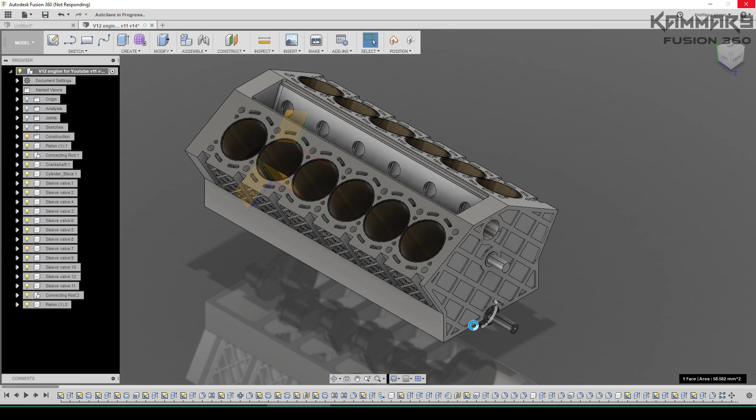When you rotate now the crankshaft here, you have to see this movement of the pistons.

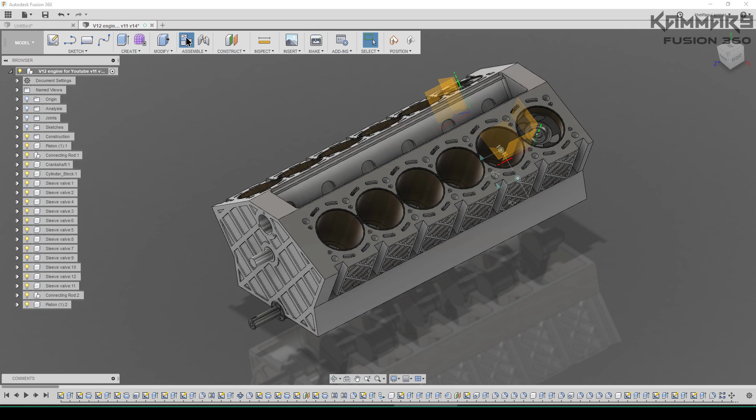To start, I will create another component here. To do that, go to assemble, new component, or from new component here. Make sure this one is activated.

Then you can rename this like cylinder head. Okay, then activate it. Press OK.

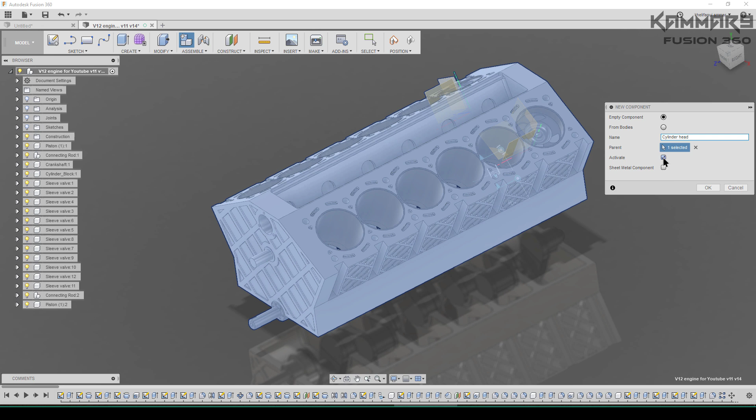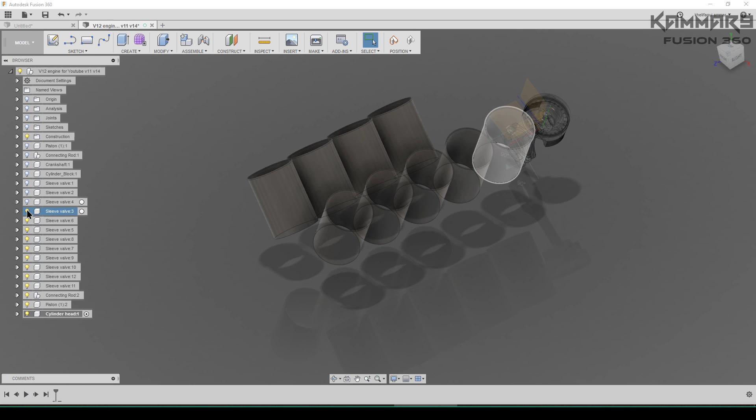For me, it's difficult to work like this. What I'm doing here, I hide all of this, or you can select all of these. I think you can use shift in Windows, then hide.

Then you can start your, show the origin.

Once you show the origin, make sure the Z axis is here, the X axis is here, and the Y axis is here. Then we start in this plane.

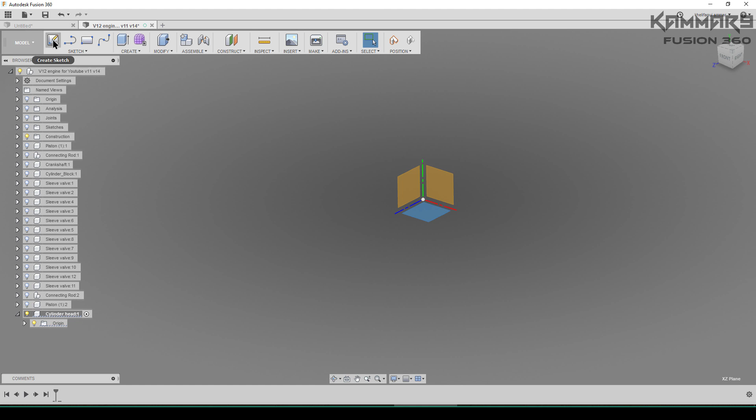Select this plane and go to sketch. You can continue.

Then start with a rectangle. Start from here to this side.

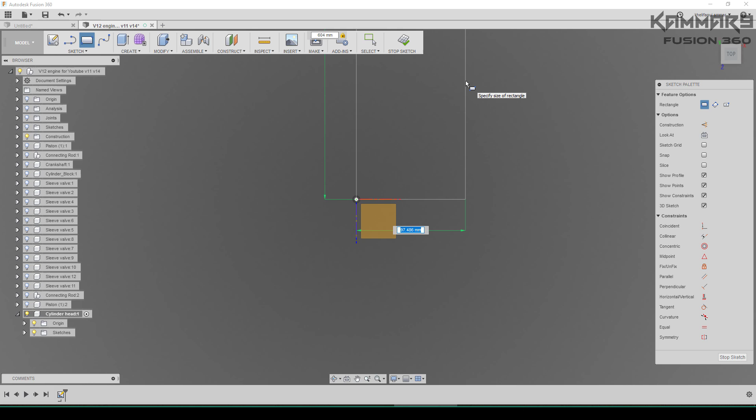Then what we have here, we have 604 millimeter. Switch with the tab in your keyboard and put here 145.

I will add a caption to say exactly the dimensions here.

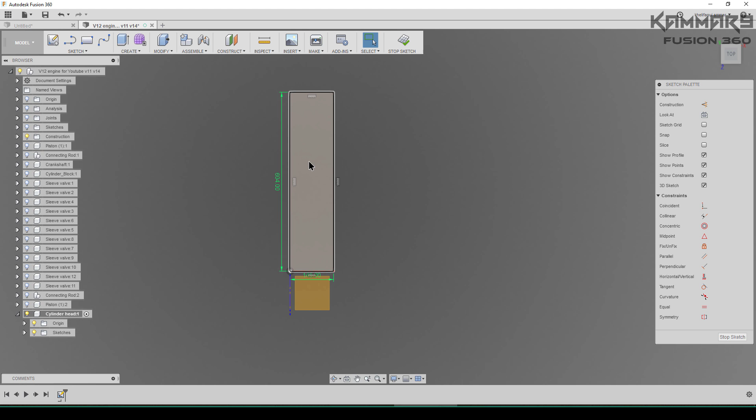Now what I have to do here is to add an extrude. Select this.

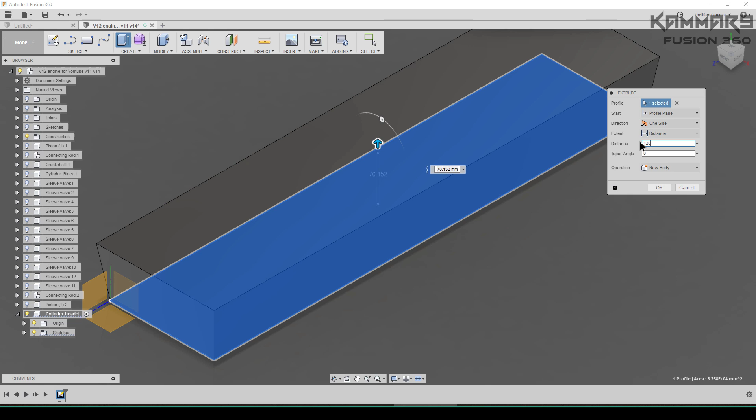Then I have just to activate taper angle here. Sorry for that, I can't see exactly the angle. The angle is 8 degree, sorry for this, and the distance we have 120 here, and you can press OK.

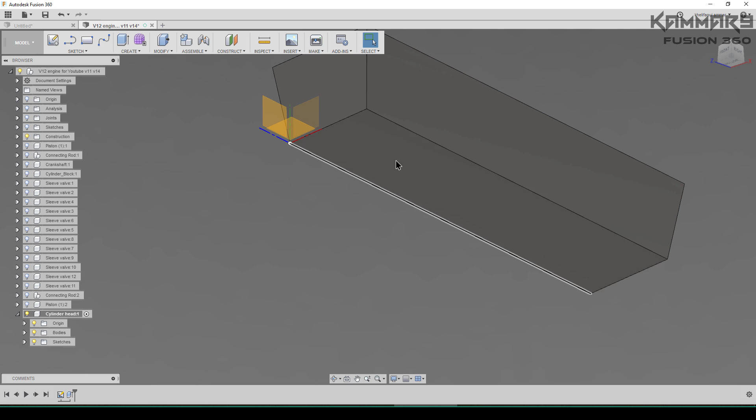The next step is to add line here, okay, like a reference.

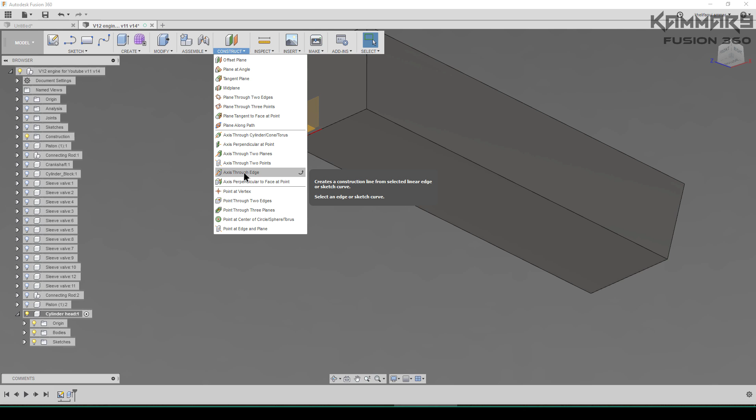Go to here and you can add axis here, but the problem, I'm looking for axis, but I can't find it. Okay, it's not a problem.

I have just to add a point here. Go to sketch, select this surface and go to sketch, create a sketch, and rotate your model like this.

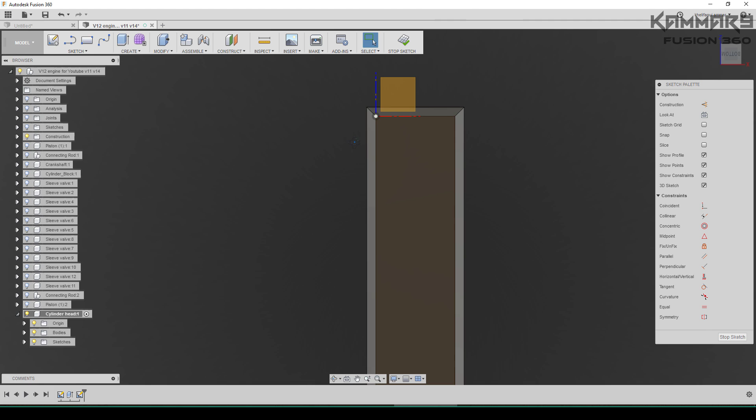As you can see, the X and Z axis are here. Then add a point, go to here, look for point, add a point here.

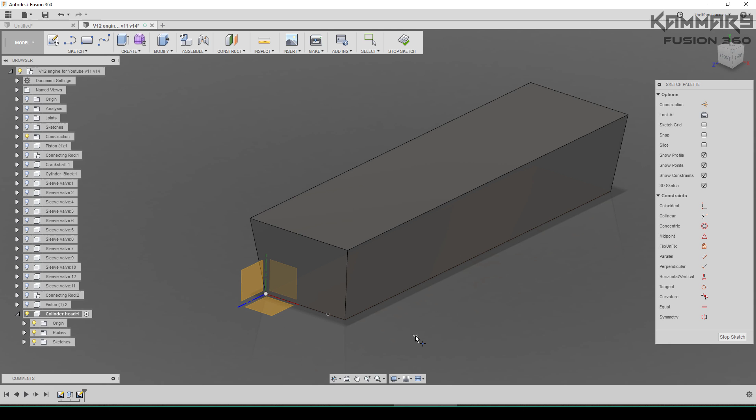The distance of this point, I'm looking for the distance, press D. The distance here, we have 36. And just stop the sketch.

We need this point to add a reference plane. Use construction here. Then look for plane at angle.

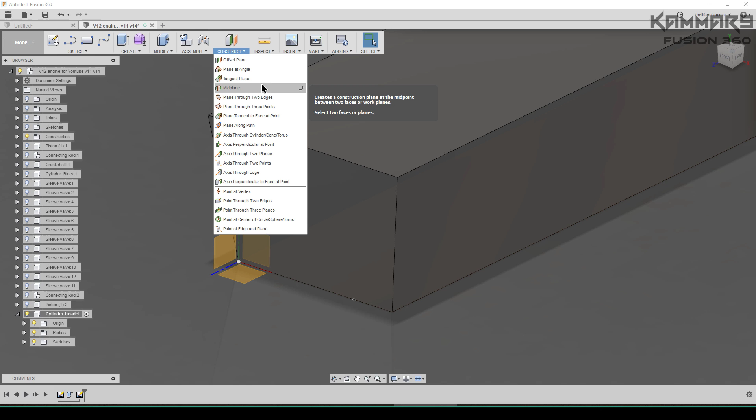As you can see here, tangent plane, plane at angle.

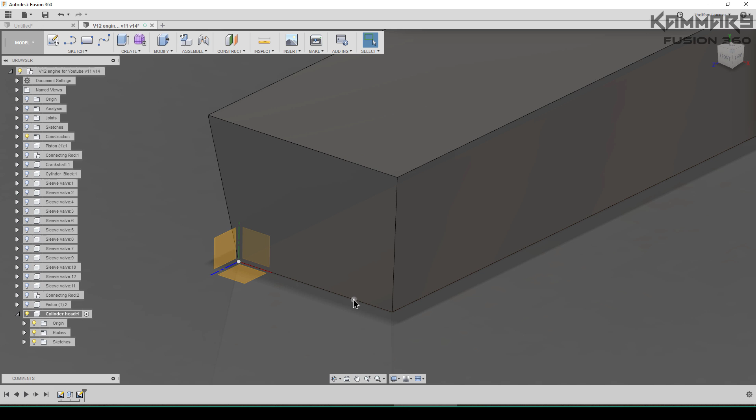I want to add, it's not the same thing like SolidWorks. I will edit the sketch. Go to here, edit your sketch.

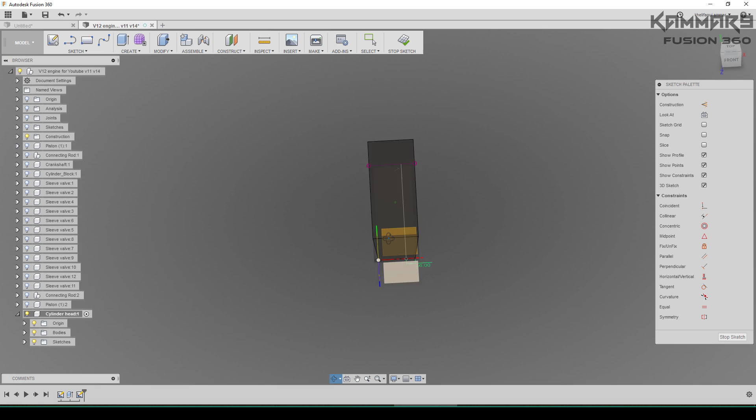To do it simple is just add line here. Verify your work. As you can see, from here to here we have 36.

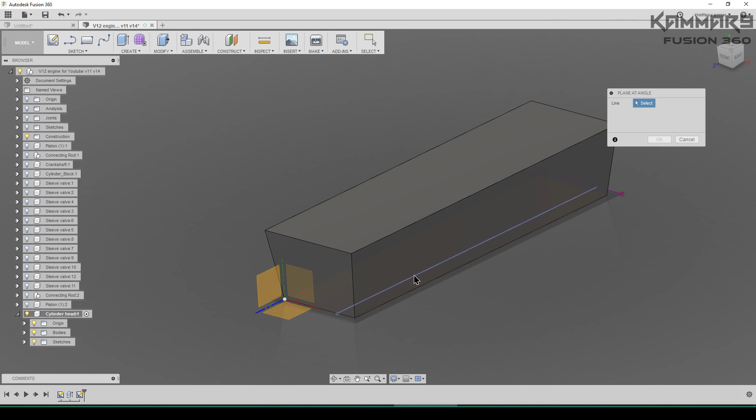Stop your sketch, and now when you go to here for construction, you will find plane at angle. Select it and go to this one, and now you can rotate it.

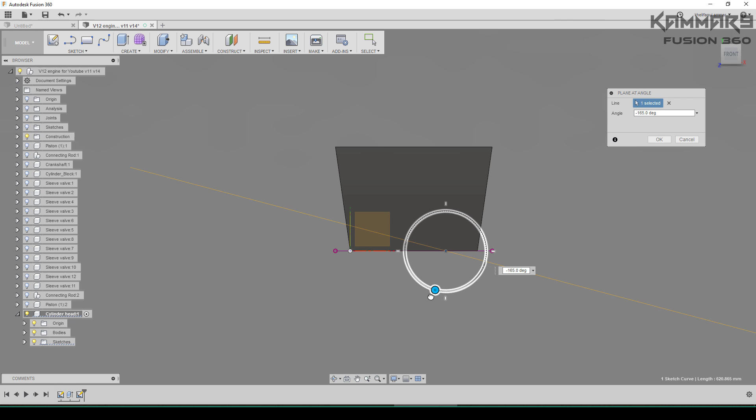As you can see, for me, I will rotate it looking from here. You have to see X here and Y here, and your plane, it will be like this.

But the angle here is 165. Okay, then press OK.

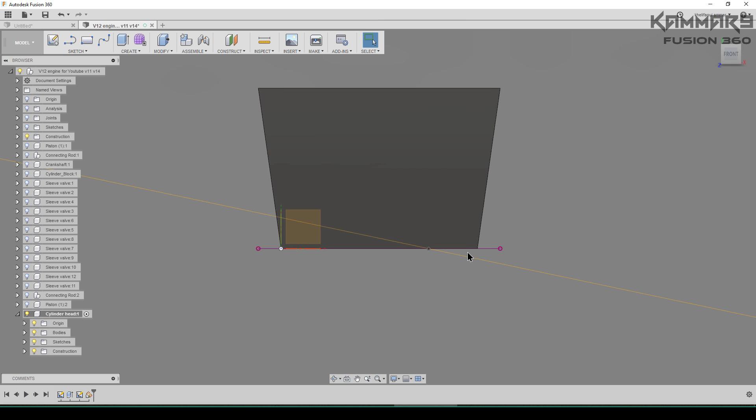As you can see, we have now a plane here. I will select this and go to sketch.

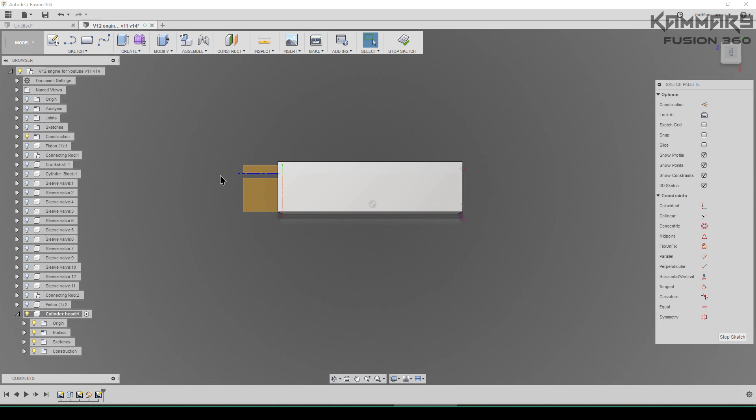You have to rotate your model, or you can use slice.

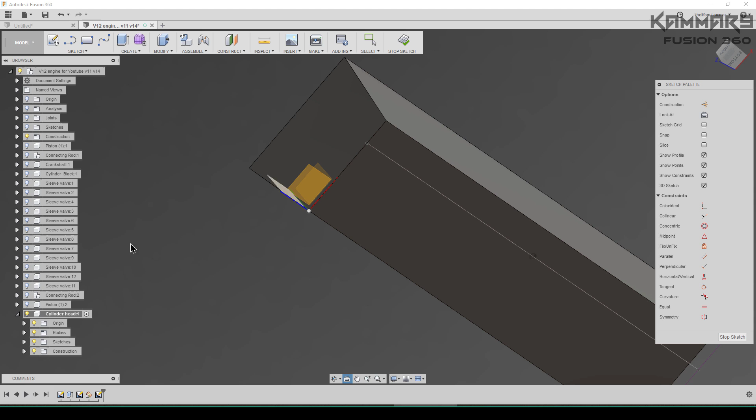I want to use slice because here, okay, then look at, but I have to show the plane. I need you here. Look at this one.

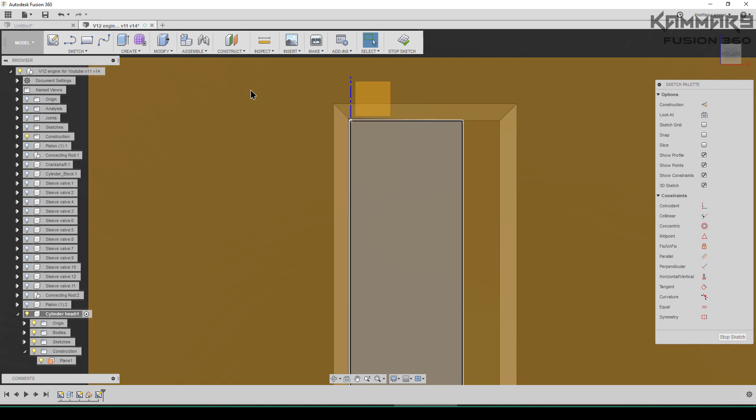Rotate your model like this and use, starting with a line.

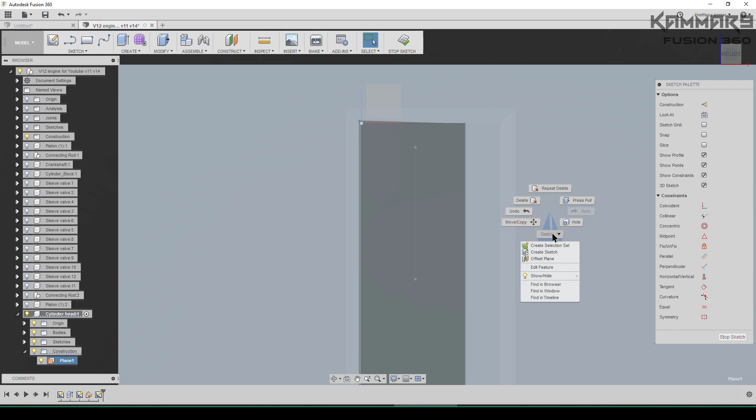It's not a problem when you start from here. Okay, just for make it like reference, I need sketches. I need the distance from here.

Okay, make sure your reference is here. From here we have 75.

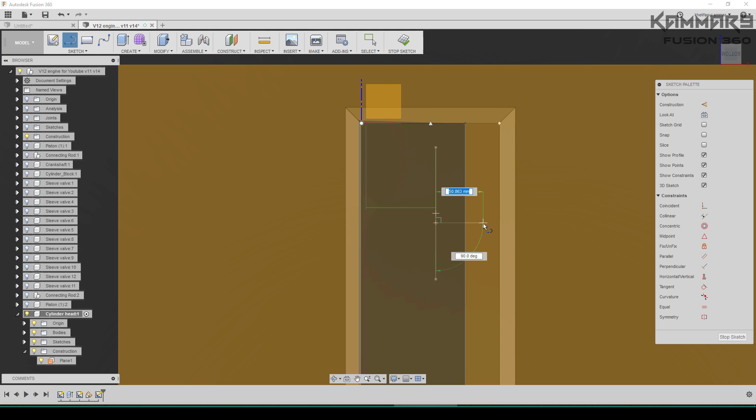Then I will add another, okay, let me delete this distance. From here we have 97.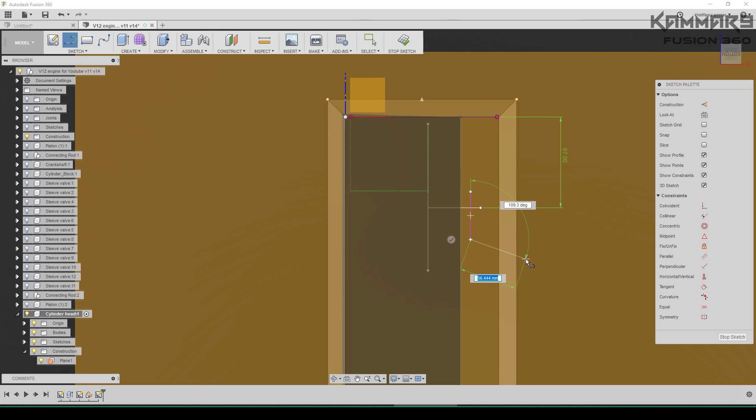Once you finish that, add another line here. Distance we have 30.

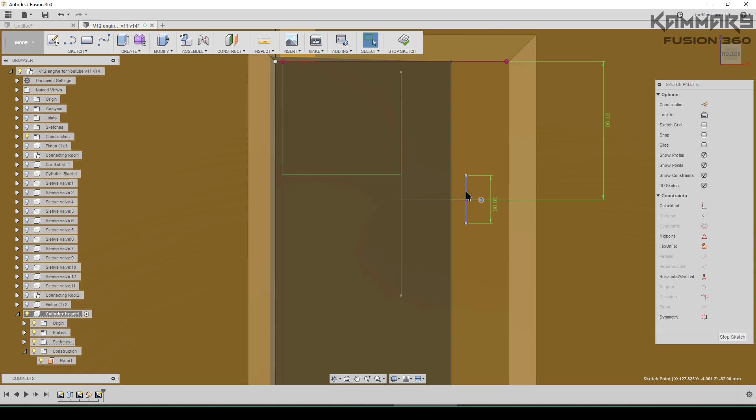And make sure, I'm looking for coincidence midpoint. Let's see, midpoint, there you are. And we have a midpoint here.

Slice to see what's going on there. You can hide this. Then we have the distance between this line and this one.

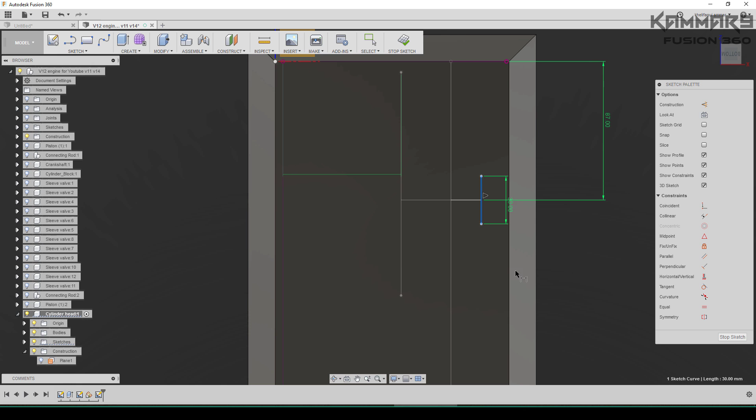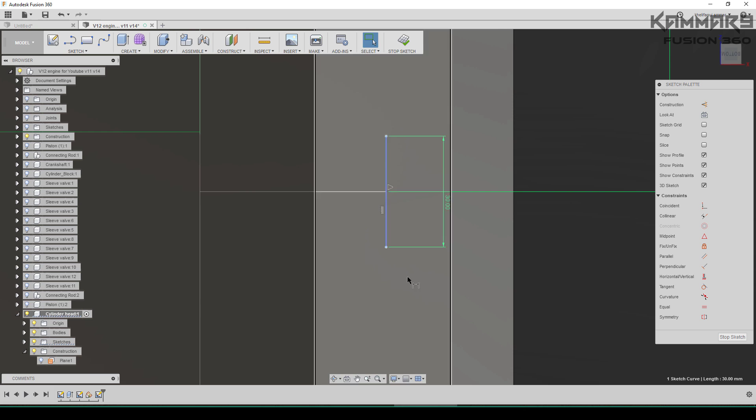There is a problem here because this one is not horizontal. Make sure that's horizontal or vertical. Then the distance from these and this one, I have to put 30 here. From here to here I have to put 30.

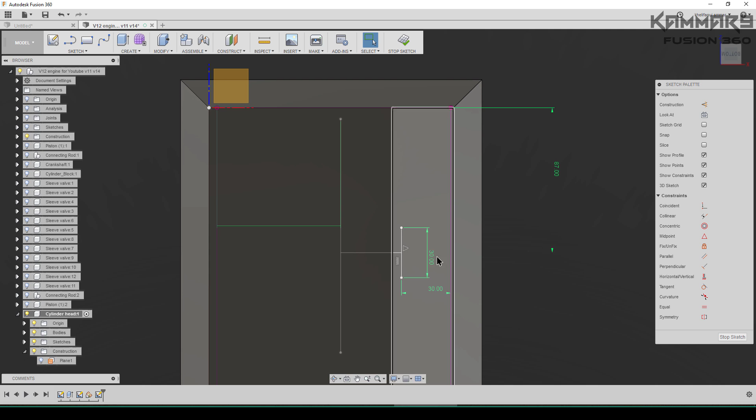Okay, step by step. We have the distance here. Here it's okay, here it's okay, and I have to add...

Okay, I have a mark here, then the distance... I have distance here 87. Then make sure that's the midpoint of this one.

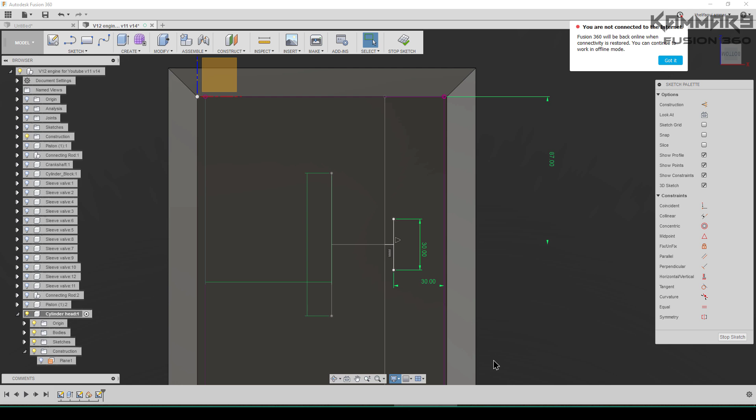Okay, I will show something here. Visibility, it's not okay. The effect, environment, dark sky, photo, infinity pool. I think that's okay, we can see better. Let's see, okay, I think that's good.

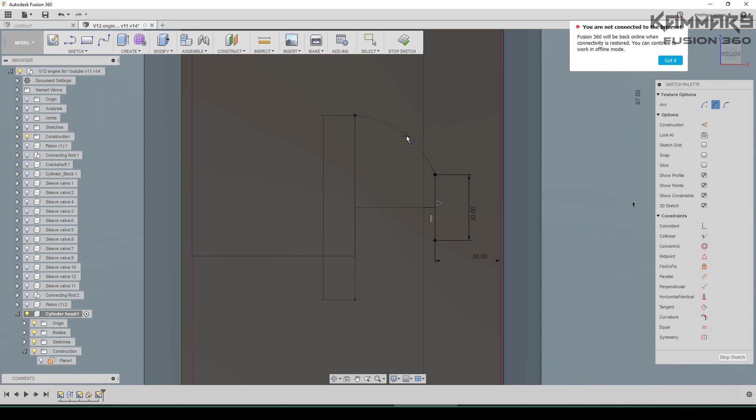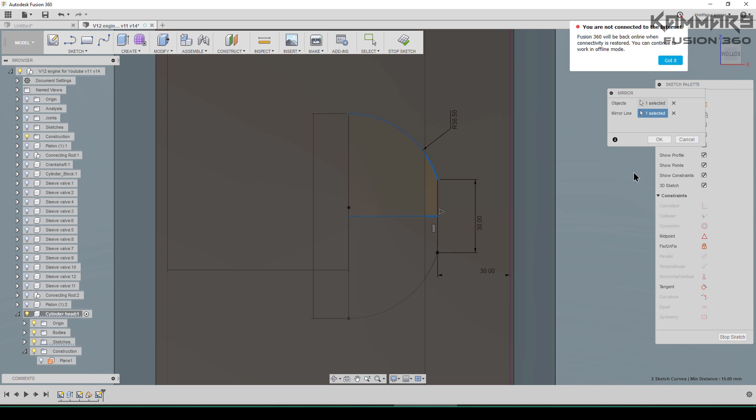Then I will select it and go to the mirror. Use here the mirror line, then press OK. Now whole thing is alright here.

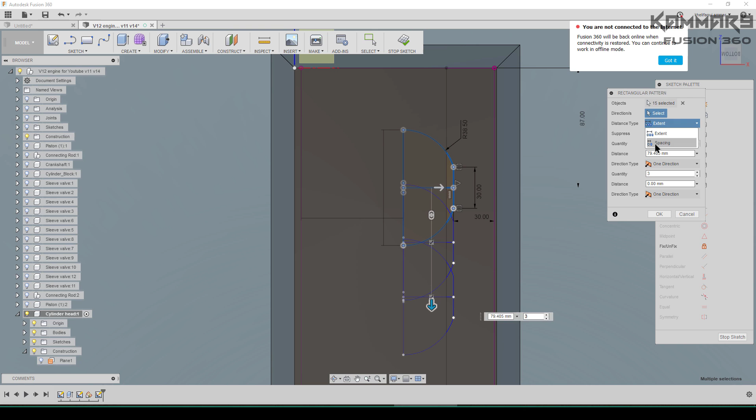Then I will select all of this one. I will repeat it using rectangular pattern. The distance, the direction is this one. For the X distance type, I will use spacing. Spacing is, we have 90 here. Then you repeat this 6 times. That's okay.

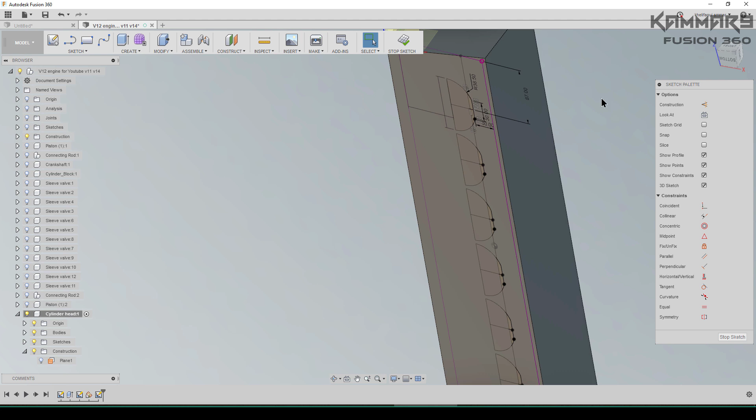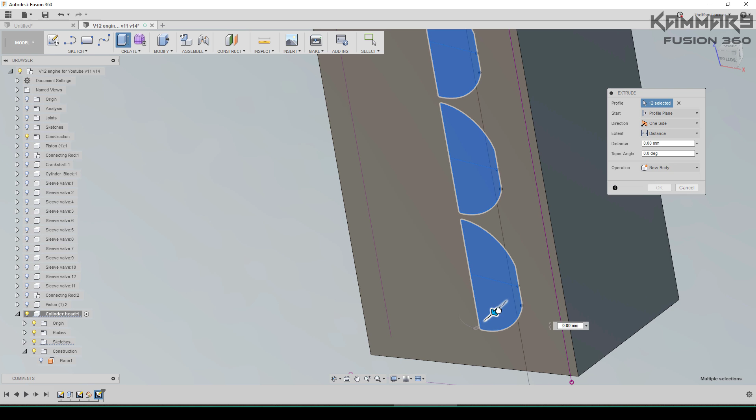Then use extrude cut. I will use extrude cut that you can got it. Can use extrude here, then select all of these profiles, and cut it with...

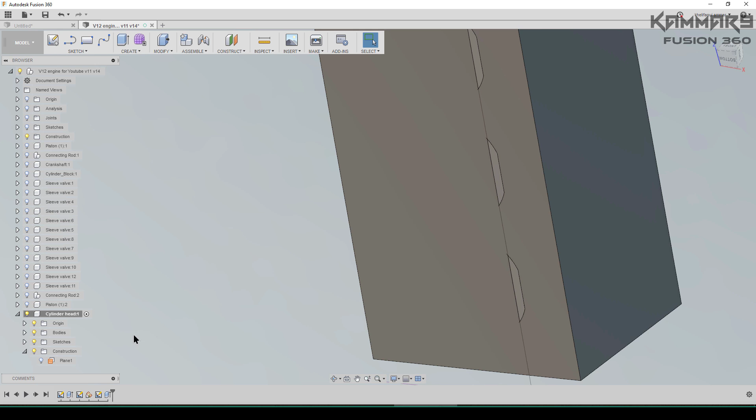Two minus 2.5. I think it's not okay because the extruded cut is 20, it's 21. Okay, that's good.

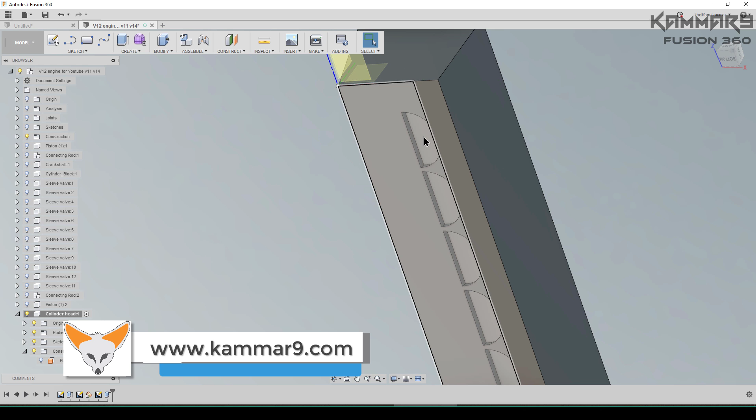Now I will create two circles here, one circle here. I have to hide the sketches. Don't forget to save your file. Saving here, then select this one, go to sketch,

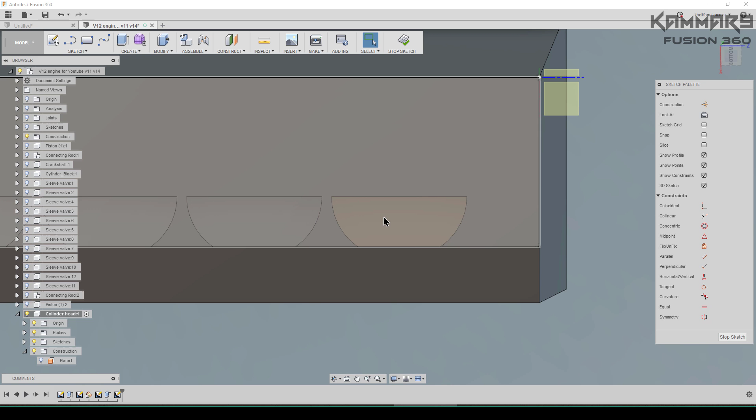then add circles. We have one circle here, another here. Make them equal, select two of them and go to equals here. It's too difficult to work like that. I will rotate it, as you can see, and add some dimensions.

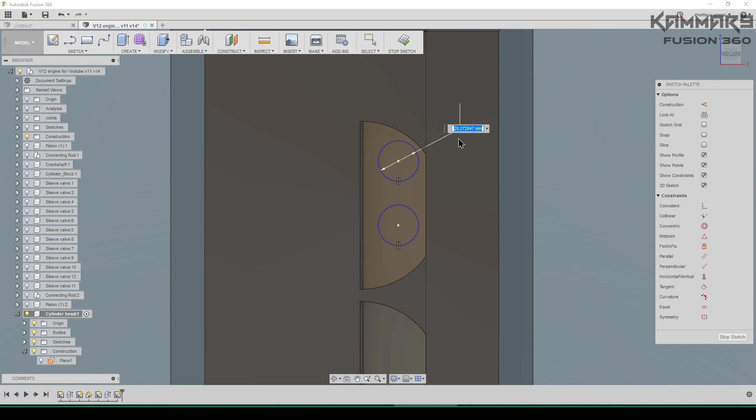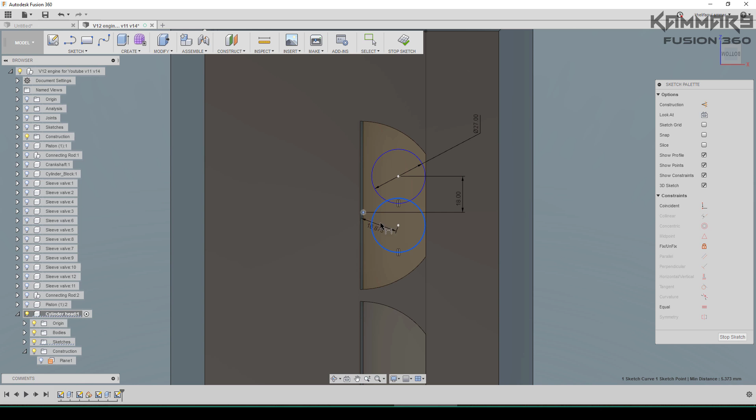We have 27 here. From the center we have 18. The same thing for this.

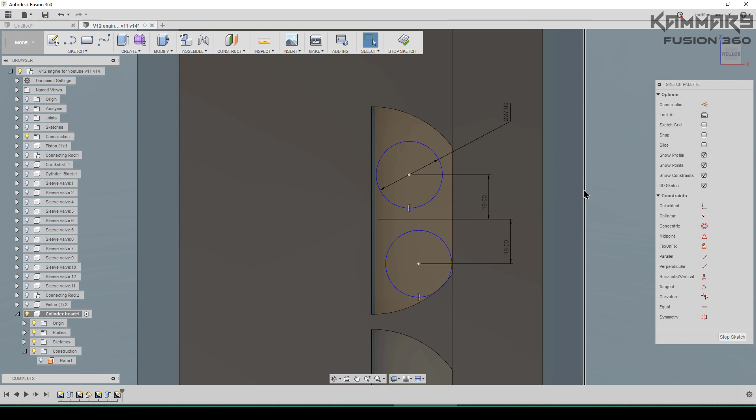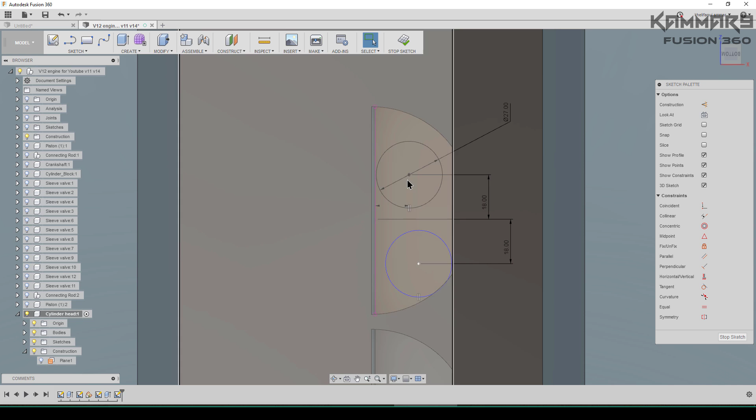Here, then the distance between, because we have 2 points, I will tell you now if it's okay. It's not okay because in SolidWorks I did it from here. From here to here. Okay, then you can just use the... where is it? Vertical between these. Whole thing is alright like this.

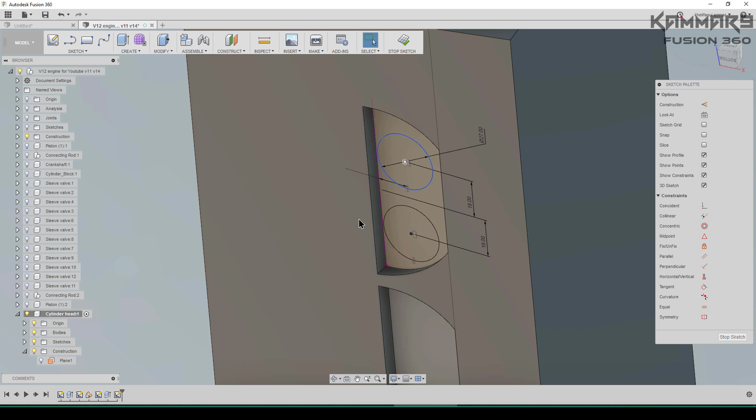Then you have just to make a cut here using how we show it, because I can't select it. Okay, the cut is -2. Okay,

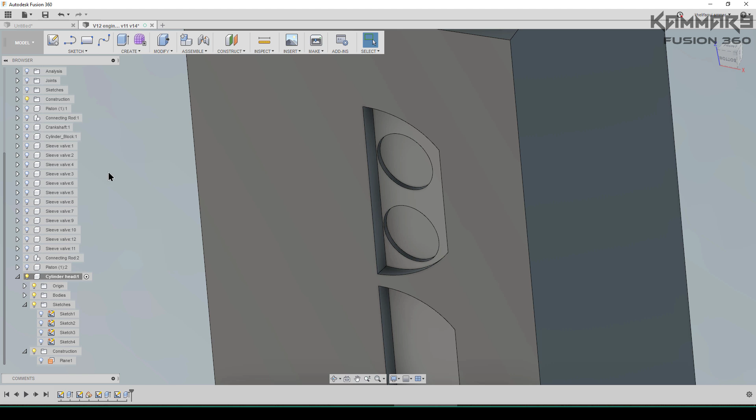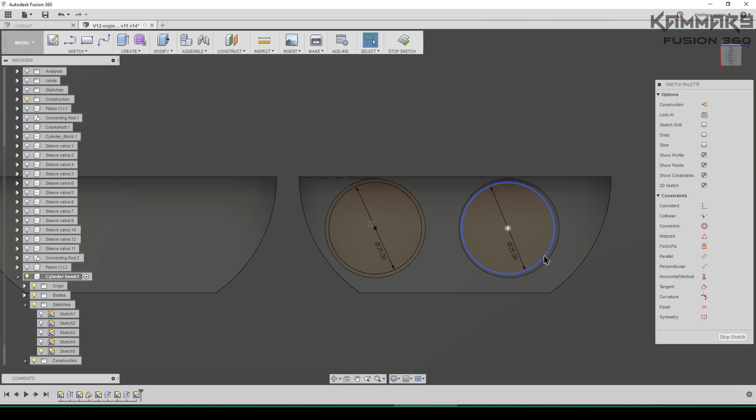then add another circles here, looking for the center of this. We have 25. The same thing here. I put like this one and add the relation between these using this. Okay,

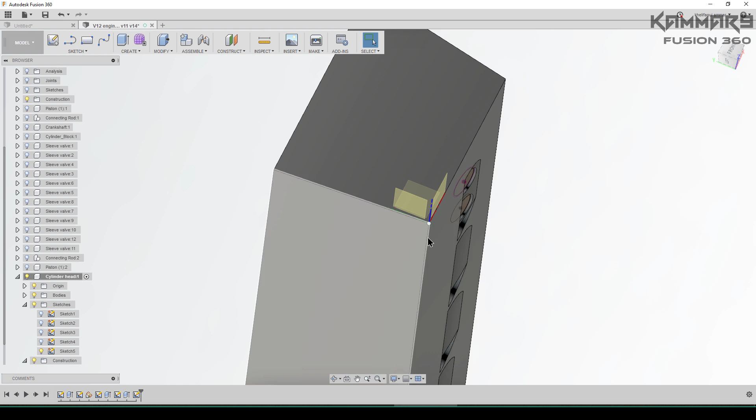Once you finish this, I will add now another. I will stop the sketch because I will use the left. Okay, to do that, I will rotate your model like this and add a circle here. Go to sketch, use a circle, then I will...

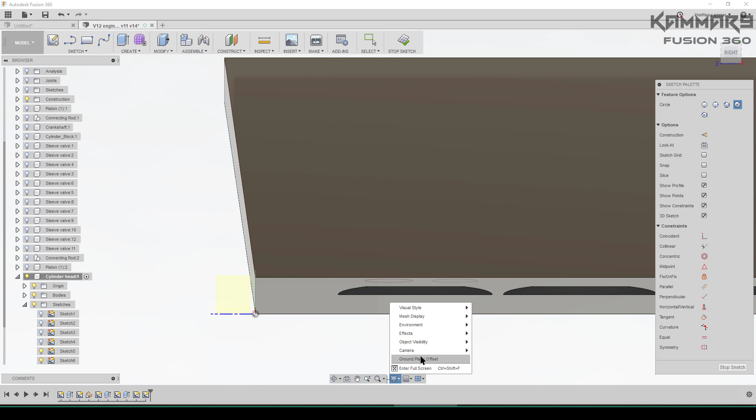You can change the visibility wireframe to find out the center of this one. Okay, it's not a problem. I will add a circle here with 45 in the diameter.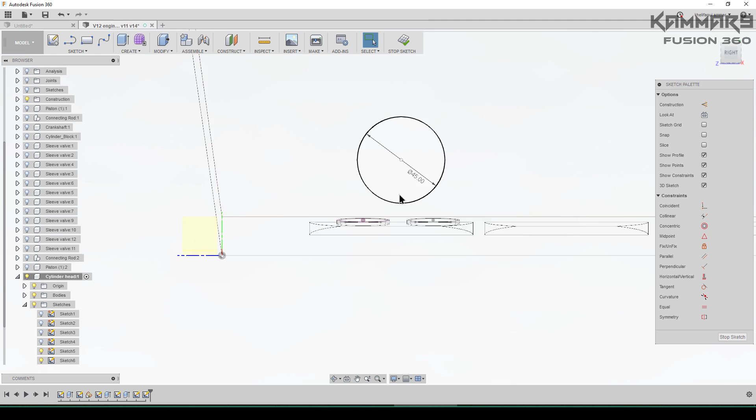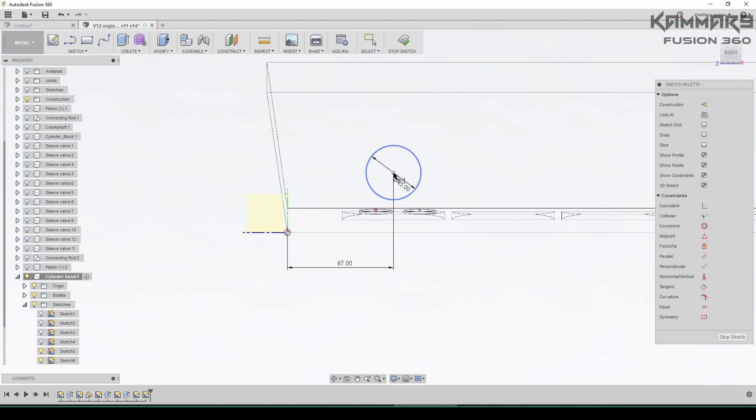Then the distance between this point and this point, okay, we have 87 on the center. Okay, then 40 from this point. Here,

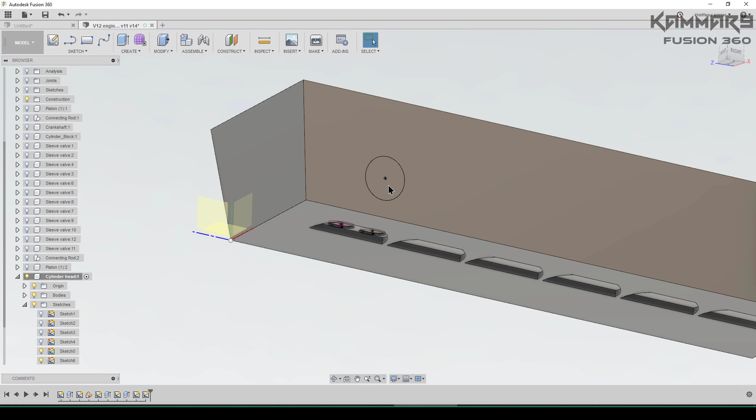And let's try to make what I told you now is to use the loft feature from here to here, but looking for from the side, from the start, make it direction. All thing is alright like this. Directions, all thing is alright like this. Okay.

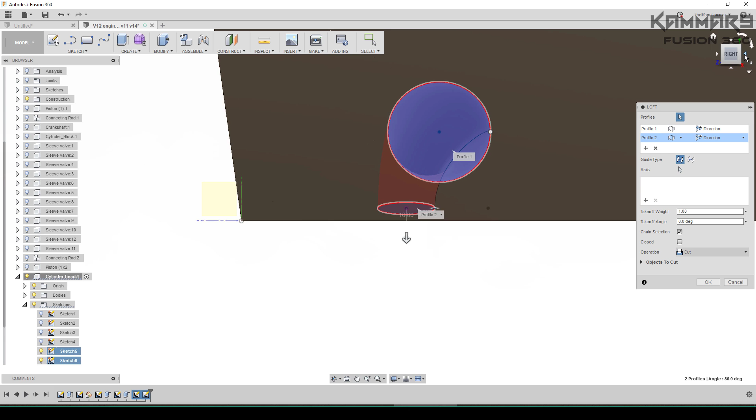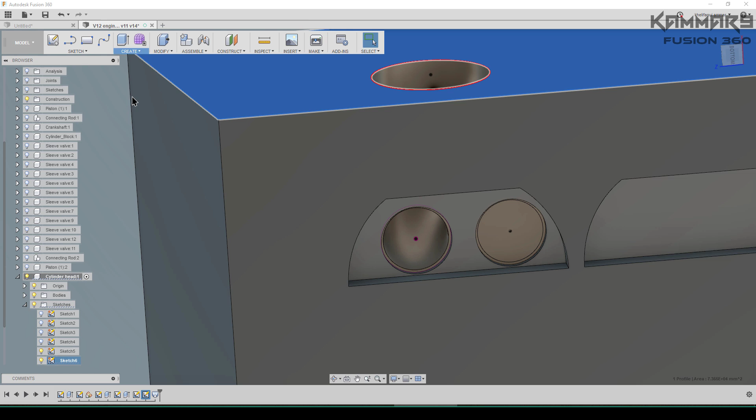Validate your feature. I will do the same thing. I will show the circle and the circles here. Go to loft feature. The profile, it's not this one, just this circle.

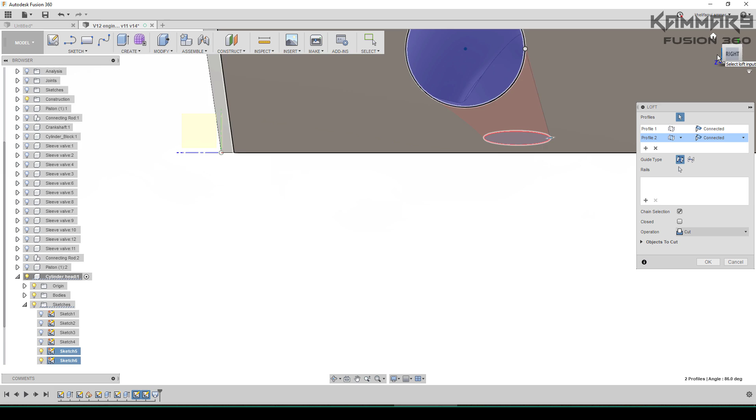Okay, then this one, look from the side to see what's happened there, make it direction and direction here. Whole thing is alright. Let's see now what we have. As you can see, we have a good result here.

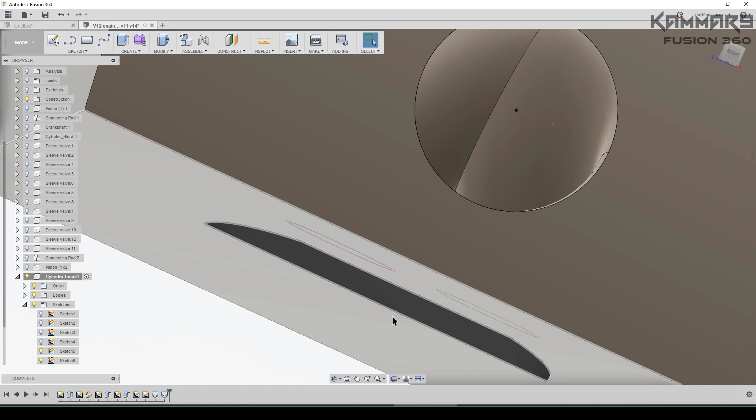Then I will repeat this using modify the pattern faces, change the pattern type here to feature.

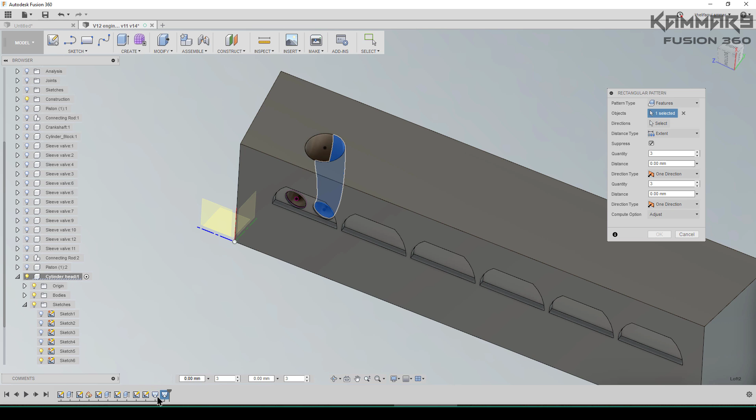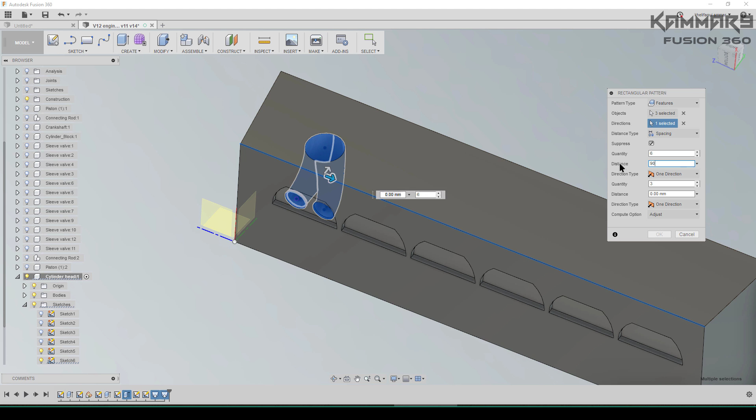Select all of these features. This one, only this one. Okay, the direction is this. Make it spacing here. Quantity is 6 here. The distance is 90. Press okay. As you can see, we have a nice result here.

And the same thing to do that in the other side. Let's go to the plane here, offset plane. We have 72.5.

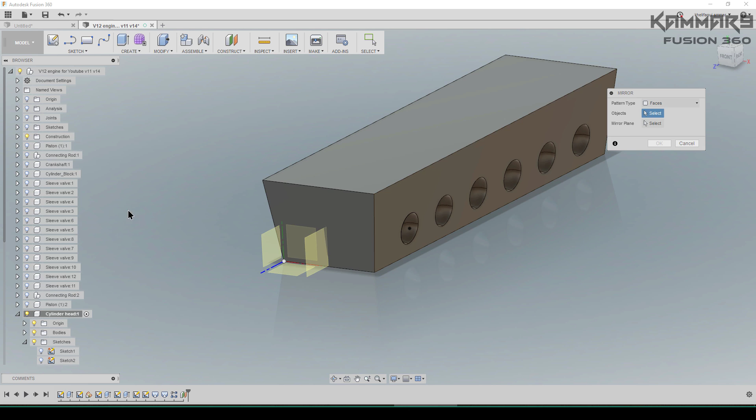Then go to the mirror line, mirror. Here you can select all of these features. Okay, the plane is this one. Press OK. Let's see the result. As you can see, you have a nice result here.